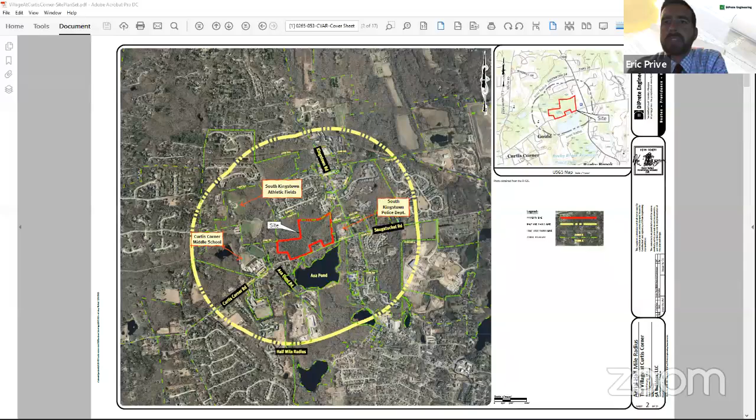If we could go to the existing conditions plan. Perfect. Yeah, that's fine. Back a few, please. One more. Two more, sorry. Perfect. So there's the existing conditions.

So as I mentioned, 28 acre parcel. It is zoned R20. It is a wooded site. You can see right here, there is a wooded swamp complex located in the northwestern corner. Right now I'm looking north, effectively due north for the most part. Curtis Corner is running east-west here.

There were some frontage parcels done by the previous owner, located right here. There are four homes located in the center of the parcel. The parcel itself has about 7.4 acres of uplands here. This is the area in the southeast corner, and that's where the development is focused.

That area is a wooded site today. There are a few stone walls located as well, right through the middle here. You can see a couple stone walls throughout.

There are public utilities in the street. All public utilities are in the street, so public water, public sewer, and there is natural gas as well.

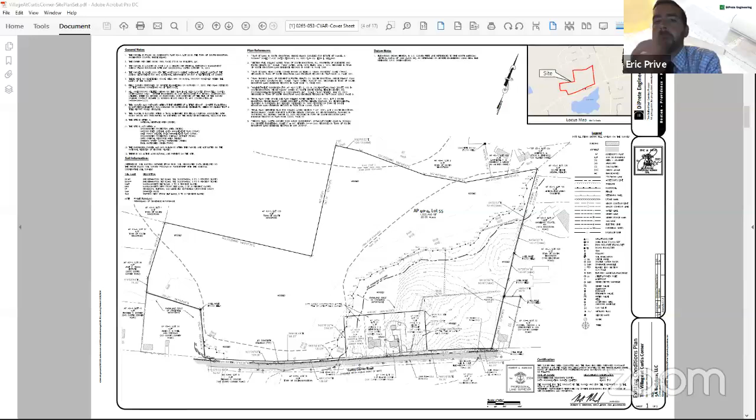So if we could go to the overall plan. I think that's two sheets down. Perfect. Thank you very much.

So this is the proposed development. As mentioned, it is a 24 lot, 32 unit residential subdivision. It is effectively the same as what was presented and approved at the master plan stage. The road comes in directly off of Curtis Corner Road, goes north-south, then takes a left towards the west, with all of the lots off of it.

Since the time, as Attorney Kenyon mentioned, we've gone through and done all the detailed engineering required to follow up that master plan. The conceptual approval happened at master plan, and then we needed to go through and do all the details for it: the grading, the drainage, the utility work, the roadway design. All those details have since been prepared.

This has been presented both to the DEM Freshwater Wetlands Program, as well as to your town entities. I know they've been reviewed by Department of Public Services. I see Mr. Bourbonnais is on tonight as well. We've also gone to a technical review committee meeting, and we've ironed out all the details as far as some of the technical elements.

To give an overview of the stormwater, we do have, as required, mitigation of all the stormwater from pre-development to post-development conditions, providing water quality improvements meeting DEM's best management practices. We have an infiltration basin located in the back left portion at the end of the road, able to collect everything from the road and a majority of the back portion. There's a ridge that runs naturally through here in an east-west fashion, pretty much in the lot 20 to lot 4 range.

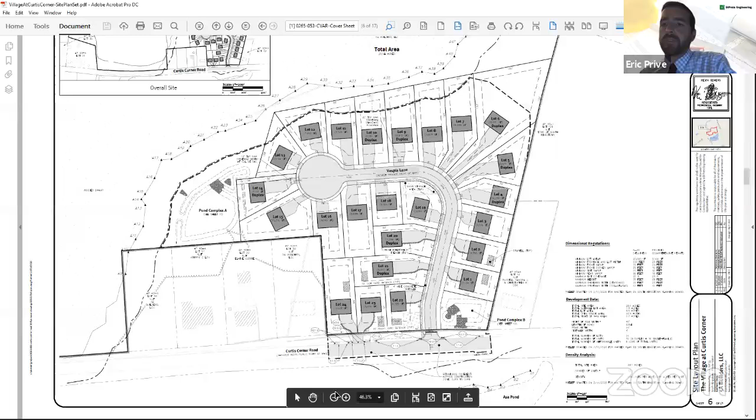So as mentioned, this has all been submitted to the town staff for review. We believe we've addressed the conditions that have been discussed. We have received Suez water approval. We have received approval from the Department of Public Services for the sewer tie-in with the sewer feasibility study and downstream carrying capacity analysis. I think that's the general summary. I'd be happy to answer any questions.

Actually, one other thing I wanted to add was about the lots in the front - we also added some additional stormwater measures. We really wanted to make sure we decreased flow to that front area, understanding the concerns of our abutter who spoke at the last meeting. So we added dry wells for the homes - I'll just circle one. For all the ones in the front part of the watershed here, we have driveway trenches along the side to pick up and treat the driveway and infiltrate extra on site, and then dry wells in the back too, picking up the roof leaders and putting them directly into dry wells for all the units in the front that are contributing to the front today.

For the benefit of the audience that maybe haven't seen all the drawings, can you just go over the size and the depth of these ponds so they have an idea of what they're looking at?

Sure - so the size and depth of the ponds: the depths are usually around 2 to 3 feet. They're made to meter out, and they have to meter out within 36 hours to ensure they're not holding water - we don't want to be holding them for mosquitoes or anything like that. So it's all metered out in that amount of time, the one in the front as well. So there's two major ones here.

So there's one located in the back here, and then there's one located in the front, the southeast corner as well. It'll treat it on site, infiltrate it directly back into the groundwater, and also meter it back out to mimic present day conditions. As required by both the town and the state, it needs to work for all conditions, the 2-year, 5-year, 10-year, 25-year, and up to 100-year storm event. So we've mitigated all of those measures.

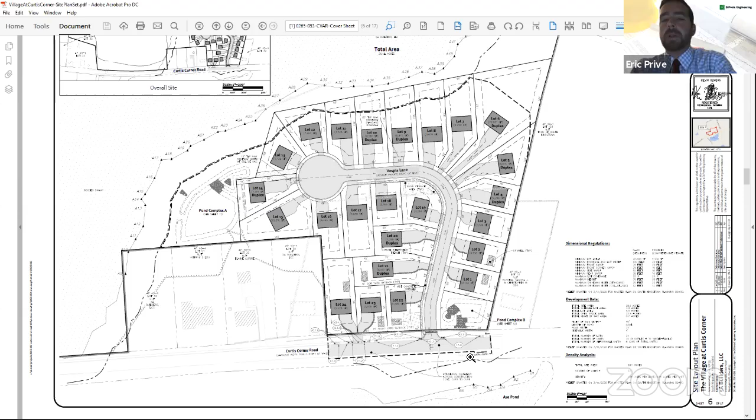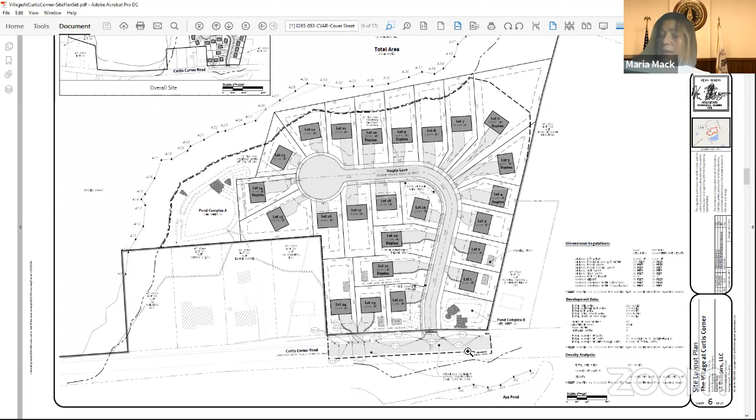Okay, board members, any comments, or staff, any comments? Mr. Prive, could you explain the difference between the locations and the slopes and dimensions of the ponds since we last saw this at master plan? Also, on sheet 11, could you give us more information relative to the embankment of the pond, specifically the impervious embankment?

Hoping very much that that does not mean riprap. No, it does not. So, yep, no. Thank you for, yep.

So the embankment is something we've been working on. It is internal to the core of the pond. Anytime the pond builds an embankment in what would be above as a fill condition, we build the impervious core. It's in the whole downstream side to be able to hold up that berm. It's underneath, it's a silt material, and it effectively makes it impervious underneath. What we want to do is make sure we're really holding that water and that it's not causing any future blowouts in that area. So that's what the impervious core is for.

It's meant to, on the surface and visually, look like the grass siding of just like the rest of the pond. It does not look like riprap. It is not an armament or anything like that. It's grass. The core itself is internal to the embankment.

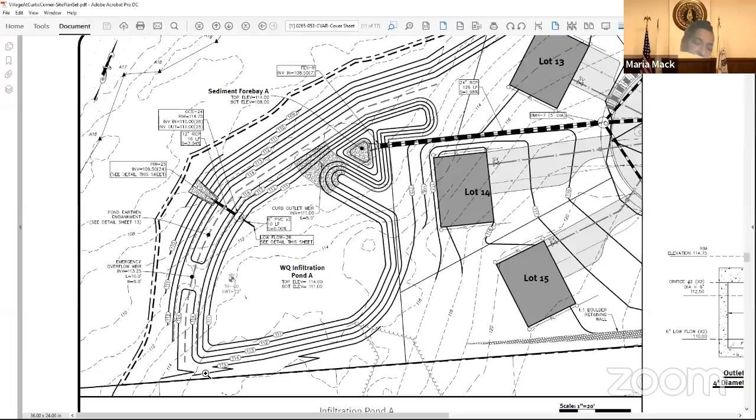And the lots that have these stone trenches, lots 1, 2, 20, 21, 23, and 24, it's understood that that is necessary given the propensity of the site to have flooding and relatively poor drainage. How will those be maintained, and what's the criteria for how effective they will remain?

So as part of the homeowners association, we'll have a homeowners association as well as part of the stormwater program. Both of these ponds have a stormwater program that needs to be done also for the infiltration basins and such. So as part of that, these units would be part of the practices as well. It's sort of a belt and suspenders approach.

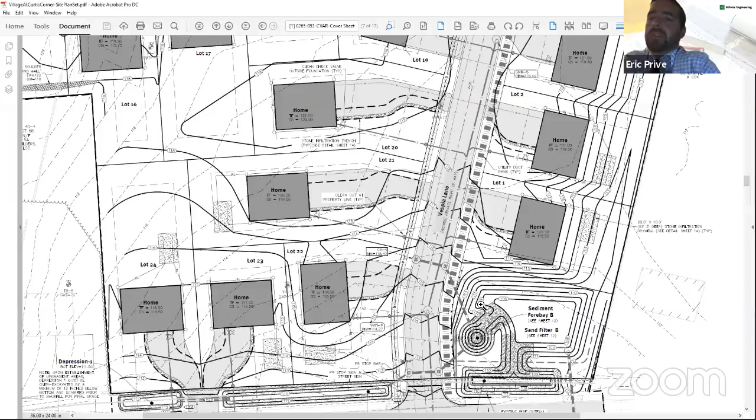We did it primarily for the front ones, knowing the watershed coming to the front area and the swale that was holding water, and knowing our abutters today. So we wanted to add some extra treatment in the front for those units, especially on the dry wells, so we can infiltrate it directly on site. It's also good practice to infiltrate as close to the source as possible. So it would be part of the homeowners documents, ensuring that they get done for compliance.

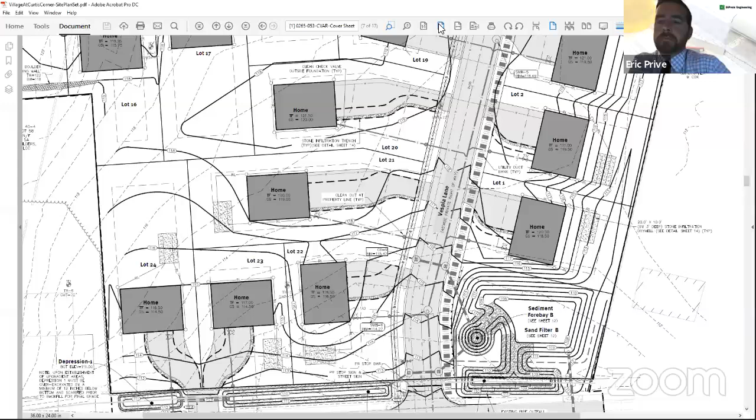Thank you. You're welcome. Eric, looking at the cul-de-sac, it looks to me like it's about 80 feet in radius. That's the standard South Kingstown cul-de-sac that we ran for, to make sure that a fire apparatus could do a full turnaround in that area. So we did not change the size of that.

Okay, so we wouldn't be able to landscape the middle of that without infringing on the turn radius for a fire truck? You mean internally, like in the center of it? It's just, I mean, it's a big impervious space, and we've seen mixed success with that.

The issue we end up seeing with it is unlike some of the storm, the level of maintenance that comes to it and such. So it's not impossible, the calculations are done with the impervious area in there to ensure there's proper treatment, both treatment of it and mitigating for it. But yeah, it wasn't our vision to put a center island in it, just given the plowing and the ease of use, that's really what it came down to.

A lot of times when you put an island in it, it becomes a bit unsightly sometimes. The actual maintenance and upkeep of any plantings that go in it, for one, if you just do standard grass, you could perhaps, but it tends to become a little bit not well treated.

Yeah, when you look at it on the map, it's huge, and maybe Mr. Carter can address that. If we could do something so a fire truck can still make those turns, it would behoove the neighborhood to maintain it, and if they have an association, that can be part of the plan.

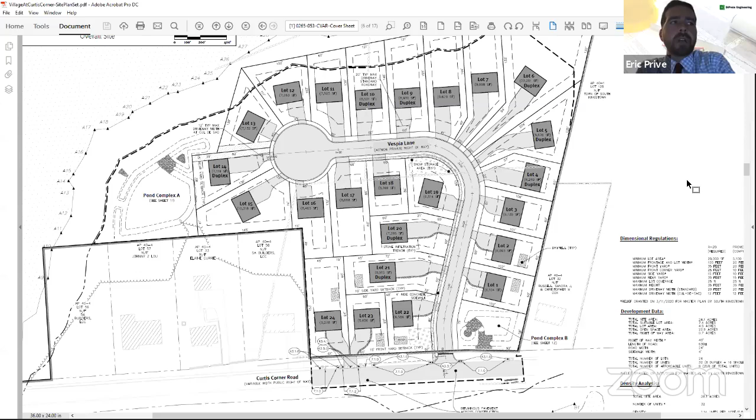My other question was, what's the situation up against the residences? What's the width of those driveways? I tried to measure them. Which area are you talking about, Mr. DiMasi? Actually in front of any of the houses, lots 1, 2, and 3.

You've got reduced curb cuts, like on 1, 2, 3, up to 7. Then on the backside, lots 9, 10, 11, you've got a much wider curb cut, almost the same width as a driveway. It looks like they're over 20 feet in width up where they come up against the house.

Right, and that's what we did. We actually added a note right on the overall plan, a 20-foot typical max driveway standard. I believe that's required by Public Services for a public road to have. Some of them, when I measured them, were close to 24 feet, but all right.

So my other question is, say lot 11, for instance, can you reduce that curb cut at the road just to have it go directly into the cul-de-sac? Is that what you mean? No, you've got a 20-foot width straight up to the house, whereas lots 1, 2, and 3 are cut back a little where it enters and accesses the road.

Sure, it just reduces some of the pavement and provides a little more greenery. Yeah, what we were trying to do also - can you still get 2 car lengths in there for parking? Sure, yes, you can. Just a suggestion. Other board members may have an opinion on that.

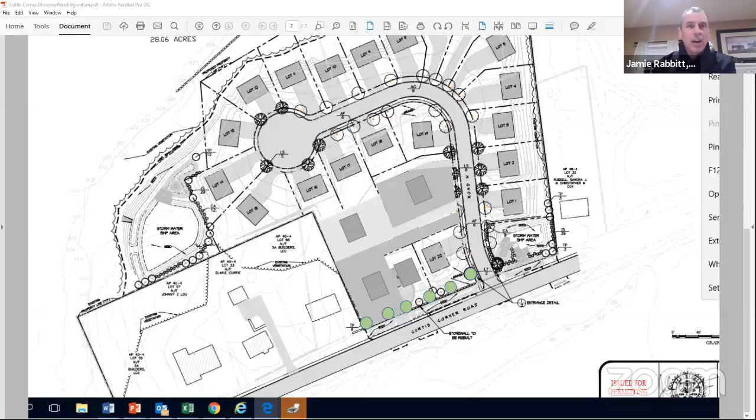24 and 25, we shared the driveway because we tried to eliminate one driveway onto the main road. That's why that has a shared driveway, which was approved on the master plan. What I said is that if you had a concern about the cars backing out, I can understand that. We can do a turnaround on the property.

I could slide lot 24 back. I could slide that house back 30 feet if I had to. There are a lot of other ways to do that than disturb this whole setup.

Regarding your remark about the affordable duplexes, this was discussed at the beginning, all about how we were going to get affordable rentals in South Kingstown. So when we came up with this plan, this was discussed way before the master plan was put together. Then we came in with this plan, and it was approved by the town.

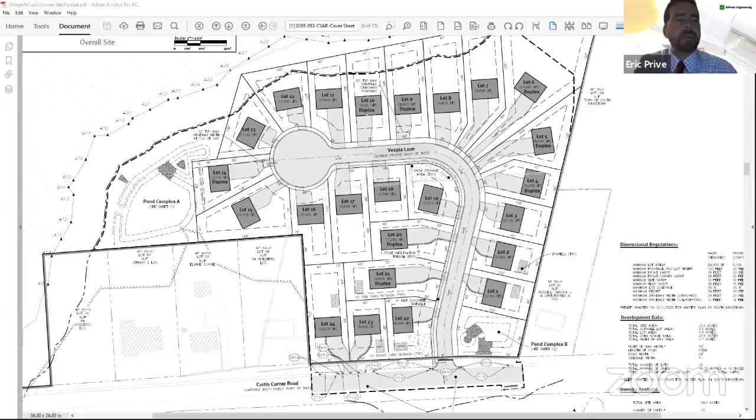I believe that's on the landscape plan too. I may be incorrect, but I believe that's on the landscape plan, that fence around the pond area. Did we add that already? Eric, can you go over again how those ponds will drain over time?

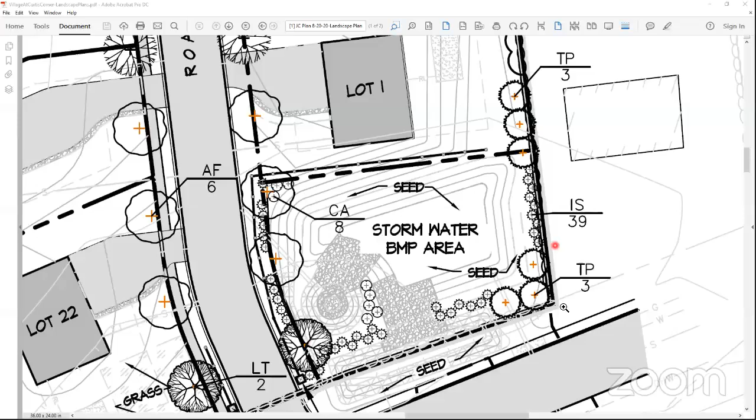Well, can I just say—are you expecting to take down the fairly high stone wall that abuts my whole property on the west side? So I'm more concerned about the house and our driveway going right up against Curtis Corner Road. I'm more concerned about the fencing going across the street area and where other students walk. Unless you're not going to take down my stone wall. No, the stone wall—no, not at all. So I'm not worried about fencing against any of that west side of my property. I'm more worried about someone going out to get the mail and then seeing water and running across to play with it before I can catch them.

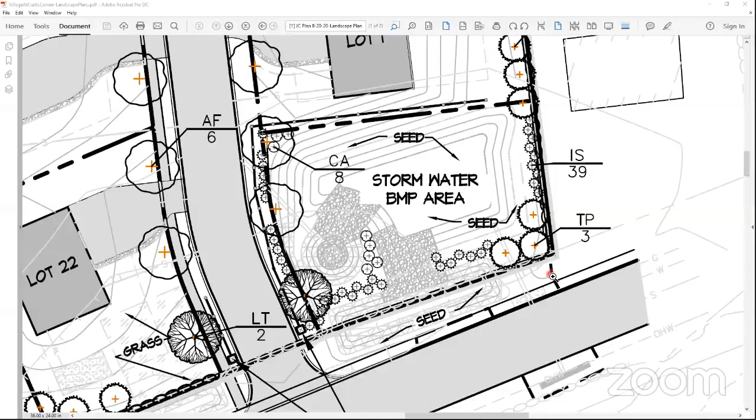And any other walkers—there is a sidewalk all across that front area. Yeah, there is today; it goes off the side of the road, there is a sidewalk, and then it does fall off to kind of a roadside swale today. We're looking to maintain that, keep it the same as it is today. We're not changing any of that, not changing the grades relative to that—it's the same as what it'll be today. We are, however, going to be able to pick it up now and bring it into our pond to treat it first before it gets infiltrated. So we're trying to maintain exact conditions as what's out there today, and not change any of that.

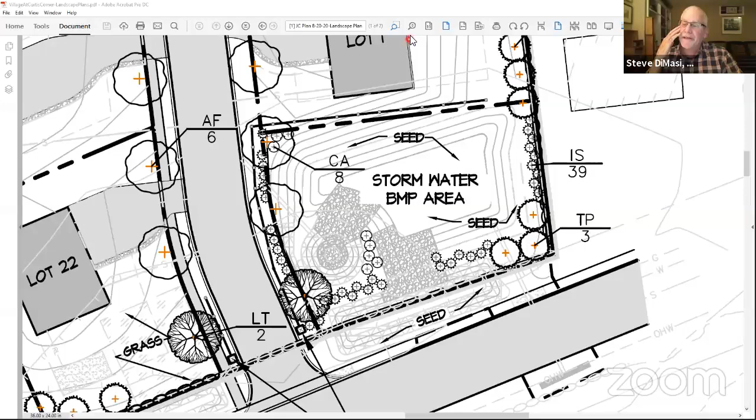But can you just go over how long you expect water to stand in those? She's concerned about standing water. Sure. So first of all, we do soil testing as part of the stormwater design process, and as required by DEM, we do testing through soil evaluations and take a look at what the receiving soils are. They give highly conservative infiltration rates, but we use them, and that's what is used for infiltrating the pond. It needs to be able to infiltrate within 36 hours—that's the requirement. So, Eric, I got a question for you.

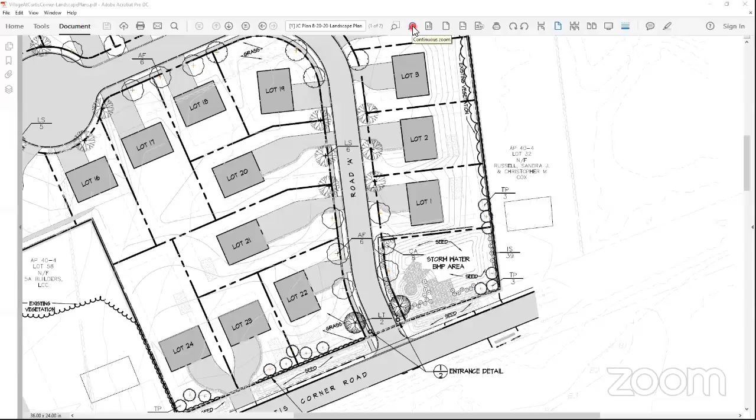This is fascinating, this is the first that we've looked at this closely, and I want to double, triple back up what Joseph Murphy said about affordability. Feels to me as a citizen, if we're talking about affordability, that we're looking for people who can purchase and not rent. But my biggest concern is about Asa Pond and what a development of this density will do.

In terms of extra traffic, in terms of lawn runoff. So I'm wondering if your communications with DEM specifically address the impact on Asa Pond, or whether that's Conservation Commission. Nope, this is Eric Prive again.

Yes, that is part of the application to DEM. So it's all of the wetlands, not just the on-site wetlands, but also the pipe that we mentioned in the wetland across the street. So yes, that is all part of the DEM wetlands application that is reviewed by the biologist and the engineer.

As I mentioned, there is an existing catch basin that's untreated today. We're pulling it into our pond and treating it and providing the water quality treatment that it is not currently getting before releasing it.

And what about the overflow situation you were mentioning? That's if it were to ever overflow beyond a 100-year storm event, that's what typically stormwater is designed for. That's the frequency of the largest storm you would see within a 100-year frequency. So typically that's not what things are designed to.

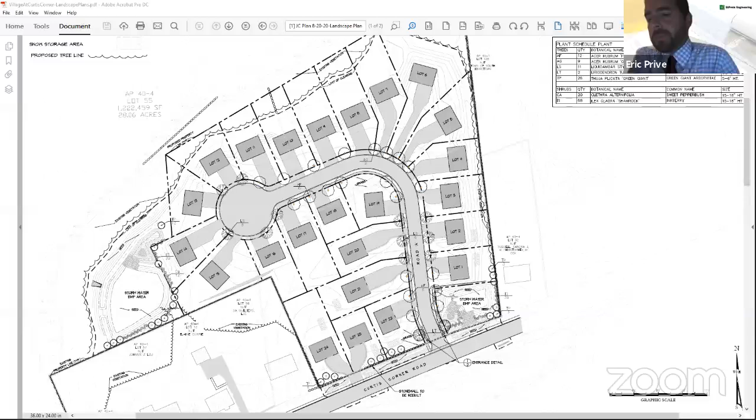And the Conservation Commission would look at those issues as well, or not? Typically, they do look at stormwater treatment, yeah, in general. Okay, great, thank you so much.

Hi, this is Randy Coleman on the other end. So Asa Pond has historically, in the last 10 years, been getting worse and worse with eutrophication each and every summer. We're concerned that at some point there's going to be no pond left whatsoever.

That's clear, and we're not sure what the runoff is, but we're certainly concerned that having this development across the street is going to make the runoff far worse. And at some point, by the way, the town built a beautiful facility here to use the pond, and the pond cannot be used for about 5 months of the year.

And this development seems as if it's contraindicated in terms of that pond being able to be used by the community as a whole. And if it's going to go up there and have any damage, I think that somehow taking that into account and doing something about that's really important, not just for the developers, but for the town to speak up about that as well. It's a beautiful resource, but it's horrible in the summer.

Randy, the town does assess that, and Richard, our town engineer, maybe can address your concerns in that area. Richard, hi, this is Rich.

I'm the town engineer. We went back and forth a bunch with Eric Prive on that suggestion of discharging the pipe across the street. Our position really became more of, it seemed beneficial to us to now be treating roadway runoff, whereas presently it's not being treated. Presently, water is discharging directly to the side of the road. Granted, it's the other side of the road. But treating it and then sending it across the street just seemed to be a better option.

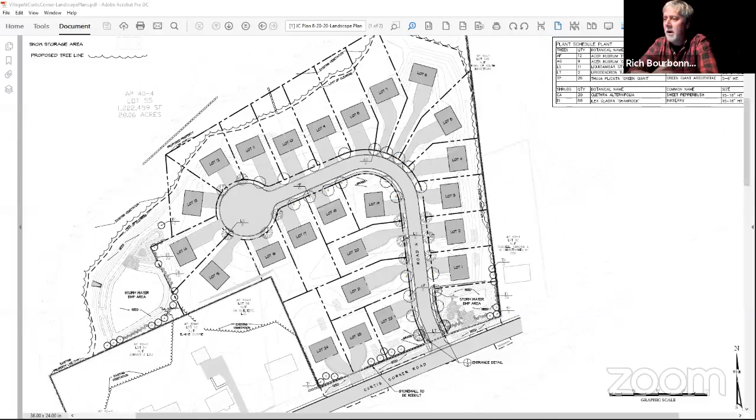Now, it's not proposed to discharge directly into Asa Pond. It discharges ahead of the pond, and it will overland flow through a thickly wooded area before any discharge gets to the pond. We looked at it a bunch, and then we also realized that DEM is involved, and we suggested, Eric and I went back and forth about how it's spread. We thought some sort of level spreader would help to dissipate the flow should it be flowing heavily. We don't want to see any siltation, so we don't want to see any silt flowing toward the pond. But DEM really ultimately has the review of this, and as long as DEM's on board, we thought equally that it would be a beneficial process for treating stormwater.

Right now it goes over to the other side of the road, but it is completely untreated. It's just the way things were. Now we would never do that now, have a discharge like that to the side of the road without treatment, and this kind of takes a bad situation and I believe makes it a little better. So you're getting your twofer with us.

Sorry Rich, but are you saying this is going to be a net cleaner situation for the pond? At the end of the day, it's going to be a better situation. Can't get much worse than it is, and it feels to me like, in some ways, the town who owns this pond is being negligent with this pond and using it as a dump, essentially.

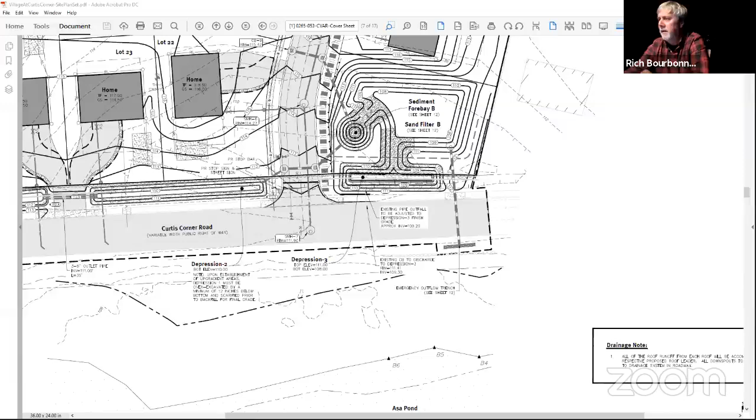But just to be clear, the DEM approval hasn't happened yet, so you're not going to find the DEM approval yet. At some point when it's approved, it'll be available through the DEM website. So really what I'm wondering is, is there still a possibility that we can have some input into DEM's decision making? Well, DEM will make the determination on whether it meets their goals. Right, okay, there's no public input on the DEM level.

There's staff that takes a look at it. And I testified earlier that I did speak to the engineer earlier today, and they said that both the engineer and the biologist had signed off on it and that they were writing up the approval. Okay, that's great, thank you very much.

And Jay, can we bring in Jamie Murdoch, please? Unmute herself. Go ahead, Jamie, please identify yourself. I am James Murdoch of South Kingstown.

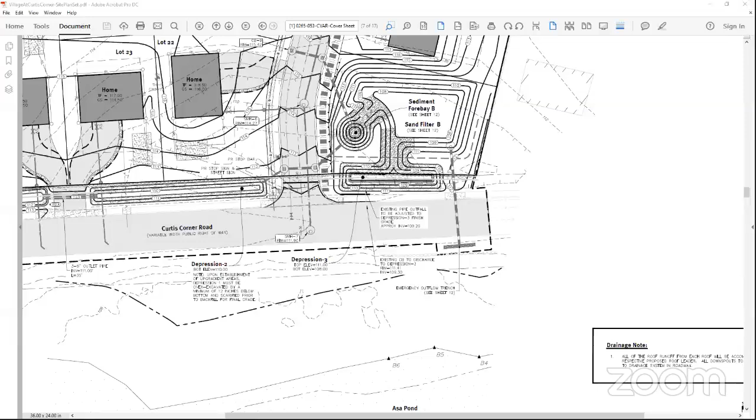I was looking at the Rhode Island housing letter, and it says that all 32 units would have 3 bedrooms. But I thought I heard 2 mentioned during the meeting. So I want to understand, is it 2 or 3 bedrooms?

End of the first paragraph from Rhode Island Housing, October 21st, 2020. Yeah, it does state that. Last sentence: all 32 units will have 3 bedrooms.

John, somebody want to address that? I believe he's correct, the Rhode Island housing letter does talk about 3-bedroom units. I think Alex, when he first was looking at this project, was talking about 3-bedroom units, so we put in the maximum amount there. So I guess there is a possibility that some of them would be 2-bedroom, some would be 3-bedroom.

Okay, well, is that a legal issue, Peter, legal counsel? So the issue is that the letter of eligibility from Rhode Island Housing stated that all 32 units will have 3 bedrooms, and the applicant is not planning to have all the units that way.

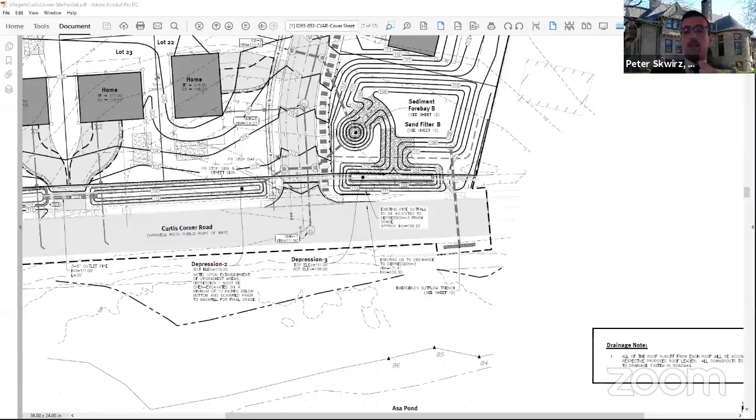John, would you be able to get an amended letter of eligibility from Rhode Island Housing on that? Yeah, I don't think that'd be a problem. I think that's probably the way to address it. We'll make sure that we get that in then.

Steve, anything else? I mean, I still would have concern, even if we are locked into the affordable units being one half of the duplex, there's still a requirement that they be of the same size and scale. So I think we have to come back to decide that. If the affordable unit's only going to be 2-bedroom and the others are 3, we're not meeting the requirements of the state requirements for the comprehensive permit. So before we jump and say let's allow some 2-bedrooms, I'm not sure that's the appropriate thing to do. I agree with you, Joe.

I was going to say, for the next meeting we'll have to have the applicant address some of those issues, and we'll go over what we want from him before we finish tonight, but obviously that was a major issue of the board's. He's clarified that it was specifically laid out, but I don't think the size was. Right, so if they also have to be comparable in size, then.

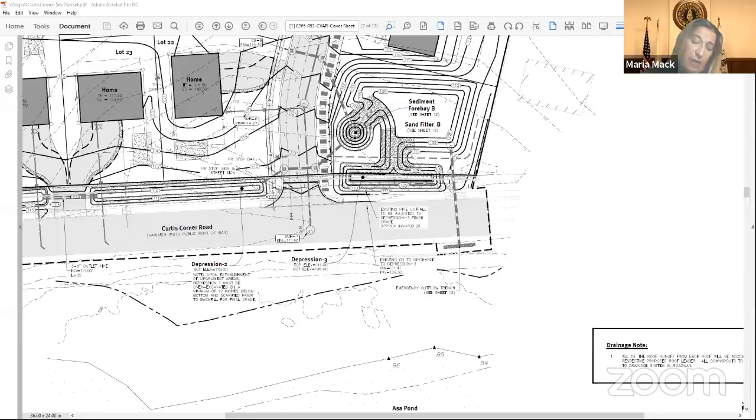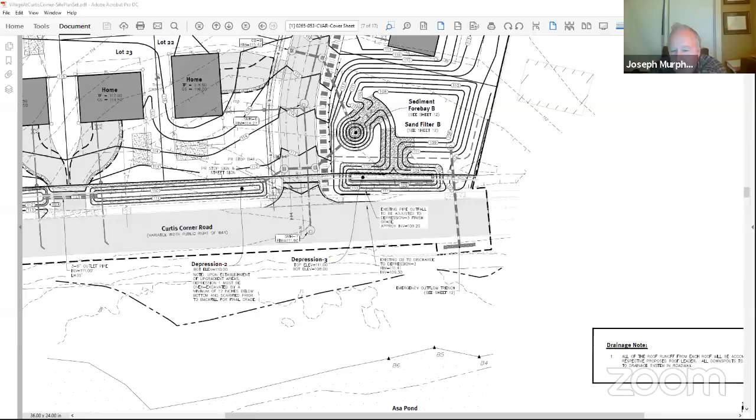I'm not sure I agree with Peter's assessment. I do not recall having approved a general approval at master plan, and that's why we specifically added condition number 4, relative to the fact that the units shall be integrated throughout the development, and shall be compatible in scale and architectural style. That condition still stands, and the issue of equability still has to be met. I'm thinking about comments we've received from legal counsel on other projects relative to master plan. We've been advised that density is something that has to be determined at master plan, while other things can be engineered or corrected at preliminary. So I understand Peter's argument, but it's not consistent with the direction we got from legal counsel on master plan and preliminary plan in the past.

But would your argument be that if they're made bigger, it would meet the requirements? Your argument is the size, Joe? Well, I probably have several reasons, but if it's determined by legal counsel that we're locked into allowing them to be just duplexes, I can go along with that if that's what I'm being told. However, there's still a requirement that they be compatible in size and appearance.

What I had heard in this meeting from Alex was that essentially the duplexes and the single family units are going to have the same footprint. What that tells me is the units are going to be half the size. He told me 1,600 square foot and 900 square foot, but he also said the units could be interchangeable because the footprint is the same size. That means the affordable units are half the size of the market rate units. That is against the statewide requirements for a comprehensive permit.

Yeah, I agree, so that's something he's going to have to address. At a minimum, we have to address the size, and the duplexes should be twice the size so the units are the same size. But I'm not necessarily convinced that was locked in at master plan. Well, Peter, you can prepare a memo for us on that.

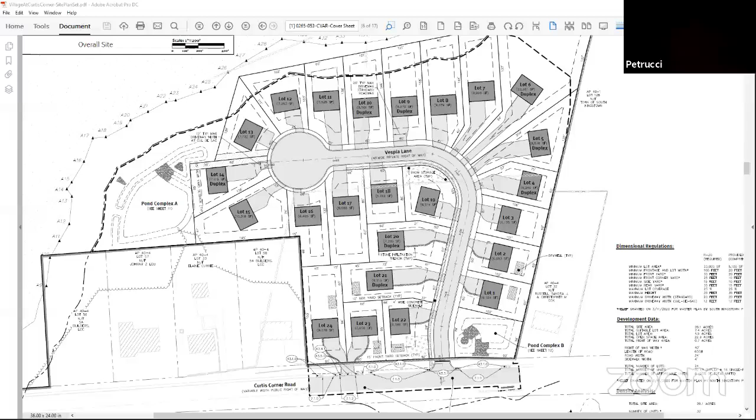So you understand what Joe is saying, that they've got to be compatible in square footage of living space. They can't be half the size. What's got to be compatible, exactly? Your affordable units have to be compatible to the rest of the development. So his argument is that your affordable units are all half the size of your single family units. Well, this is a legal question. Yeah, that's part of Rhode Island Housing's law, that they've got to be compatible. When they say compatible, do they mean compatible in square footage, or compatible in elevations? In size and manner.

Mr. Chairman, can I jump in for a second? Sure, go ahead, John. I think there are 2 issues we have to resolve. One is that it's clear the duplex units would have to be compatible - you couldn't have the affordable unit be significantly smaller than the market rate unit. So that's clear. The question is going to be whether the duplex unit has to be compatible with the single family. And I agree with Mr. Murphy regarding the bedrooms.

I don't think you could have all the affordable duplexes be 2 bedrooms and the market rates be 3, or even the single family be 3 and all the affordables be 2 bedrooms. So I think that is clear. I think what we need to figure out is whether the affordable duplex units have to be the same size as the single family market rate units.

Yeah, I think that's where the issue is going to be. And if I can just...

Going back to the master plan hearing, my recollection is that at the first hearing, Mr. Murphy brought up pretty much the same issues. We then went to the Affordable Housing Collaborative and received their recommendation dated February 14th, 2020, in which they stated that they found the project to be an innovative approach. They talked about the fact that there are mortgage finance products for this exact type of structure, and they found that the location of the duplex structures throughout the development is an appropriate method to ensure integration of the units with the proposed subdivision.

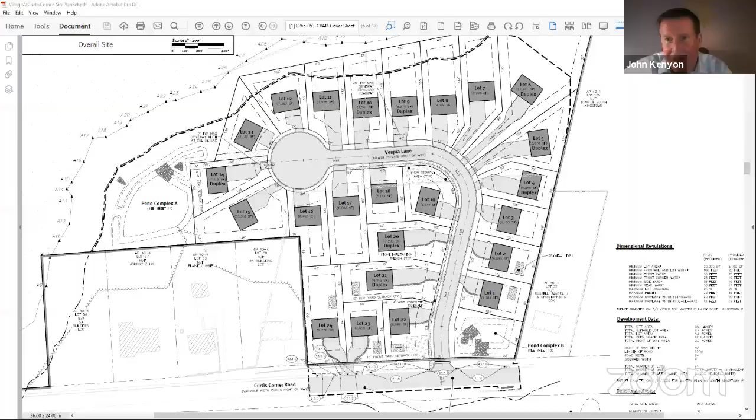I just wanted to point out that we're talking about 24 lots, and a third of them will have duplexes on them, a third will have affordable units on them. So it's almost impossible not to have them next to each other or across the street from each other, because there are more of them, which is a good thing, but it makes it tougher to spread them out when you have more of them.

And just one final note, we appreciate Mr. Rabbit's input on the lots on the left-hand corner. Eric, correct me if I'm wrong, but I thought at one point at the pre-app, we actually had the same type of setup with driveways coming in off the main road.

The board didn't like that setup, and that's why we went with the entry onto Curtis Corner. Correct. But then the reason it had a shared driveway was because phase one had a similar setup, still looking to limit the curb cuts, to not have lots of curb cuts on Curtis Corner Road. So it still had a combined driveway, that's why you have the 2 into 1 there. But yes, there was a layout that had all the driveways coming off the internal road, and one of the issues with that was also having a driveway with an easement through somebody else's, and there were issues of being in somebody's backyard or creating a side yard.

The idea was that we wanted all the units to look similar from the street, so when you drive down Curtis Corner Road, you see the lots fronting along the street. That was the vision we were going for, and having rear alley driveways was modified during that discussion.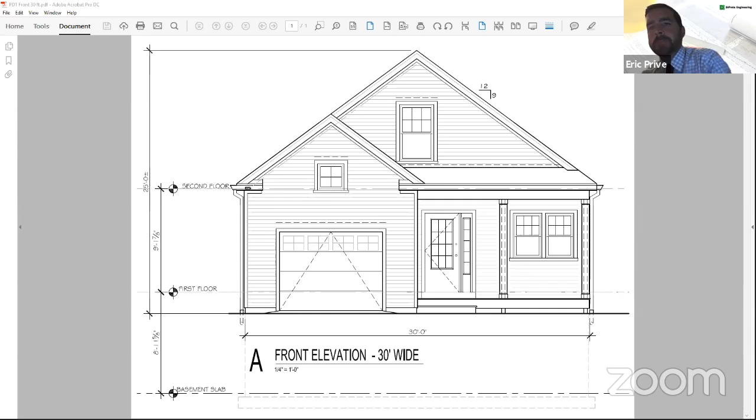Mr. Chairman, can I ask a quick question? You provided - are we missing an elevation for the duplex, which was referred to as a 2-story building today? Yeah, we only had 2 elevations, so. Is it the intent for the applicant to provide elevations of all the proposed building styles? I think just to clarify - duplex from the single family? Just to clarify, first of all, Alex can speak to the answer on whether or not the duplex will...

My understanding was that the visuals were helping paint the picture of what these were going to look like. This project isn't within the Route 1 Special Management District, so there's no architectural say on them. I think Mr. Petrucci said he was willing to provide the elevations as a courtesy, to say here's the vision I'm thinking for this village, this subdivision. So I'm not sure how that applies as far as required materials, but if the question is about compatibility, that's a different thing.

I can help you with some of this. There's going to be a few different designs, and obviously, like any other subdivision we do, we offer 3 or 4 or 5 different styles. I gave you just an idea of what some of them are going to look like, but it's market driven.

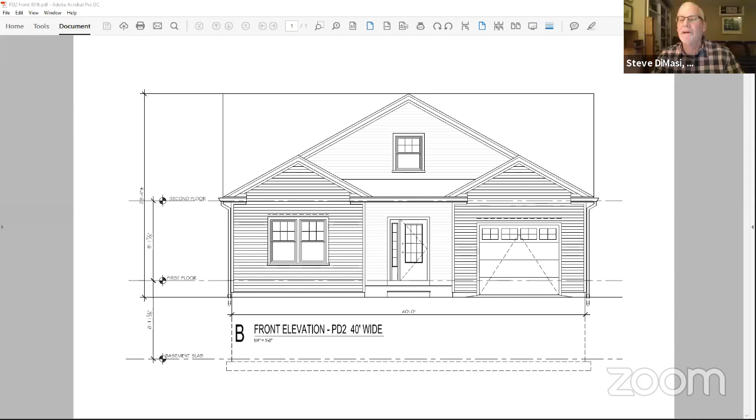And that's why we have the alternate watering for gardens during the summer, sometimes no outside watering at all. But if they can't support a fire, and we have a summer like this one, it went into odd-even and then into an outright ban, and the gardens at my house died. Continuing to add and add to Suez without them enhancing what they can supply affects all of us in town, because water bans - odd-even, okay, that's an inconvenience - but a water ban just means my garden dies, and that's what happened.

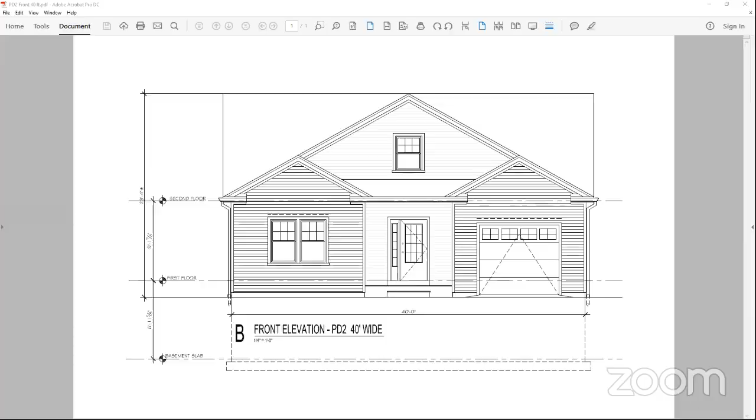So in a general sense, this is all new attachments to Suez Water, and this adds a lot of people - it's not a commercial building. I want to know that you guys are looking at that topic, because I would say Suez is out of capacity, because I can't use water when I want to.

So very tight, a lot of families. Some of these, the driveway and the house could be taking up almost 40% of the lot. So there's not much in the way of yards, and there's no common areas for these families to do recreation or anything. There's no connection to parks - it just goes right out onto Curtis Corner Road.

I think this is innovative in that it has really compacted as much as physically as possible, which is marginal. So that's it for me.

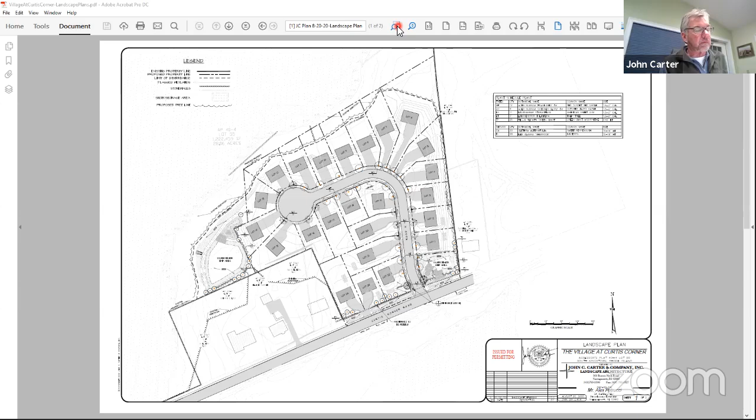I think Eric did a thorough job of explaining the site and the context of the site. Because there's a freshwater wetland and associated buffer on the north and west side of the property, it basically dictated the limit of clearing and the fact that all that extensive wooded area is going to remain undisturbed per the DEM requirements.

So the areas we looked at on the east side are heavily wooded. It's owned by the town of South Kingstown. There's a house on the east side, on the southeast side, which is the only residence at this point, except the new ones that were built recently. This is the older one that abuts the property. I know the owner spoke and Alex replied regarding a fence.

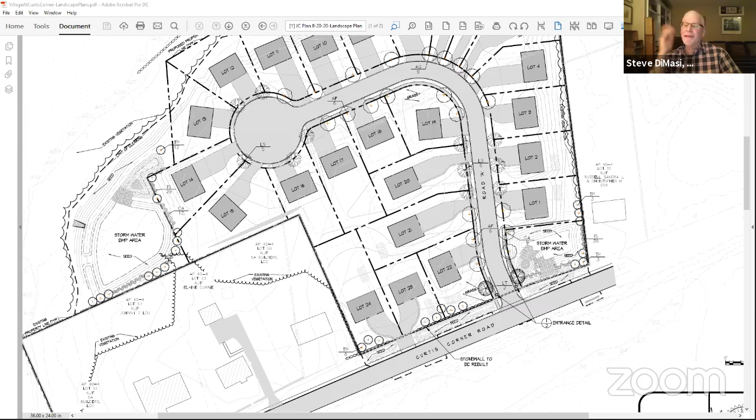But how do we ensure they're maintained and not cut down? I like to think that early on, later on you don't have to worry about it as much. I think people generally, if they have a tree in their yard and it's growing well, they'll keep it - most people do, not all, but most.

But I just want to be assured we get to that point. I want to be able to say, when these individual lots are being developed, you need a couple trees here - that's what was approved.

Mr. Chairman, if I'm not mistaken, isn't it the town's policy now that they don't really want trees planted in the town right of way? Well, no, but I want to be able to - you're right, it's not our policy but it is our preference, because we're just not able to maintain all these trees in the right of way, and even taking them down when diseased is very difficult for us with our budget. What I'm trying to say is when it's planted on private property, which is fine and even preferable, do we have a mechanism by which we can assure it stays in place?

Yeah, Mr. Chairman, I think I can answer that.

I think the way you could do it is to make it a condition of approval that when the plat gets recorded and deeds get sold, there's a restrictive covenant covering all the lots in the plat, that the street trees depicted on private property are required to be maintained. You could put a condition in that covenant that if they don't maintain it, the town could go in, perform maintenance work, and put a lien on the property for the work done. I think that would probably be the best way to handle it.

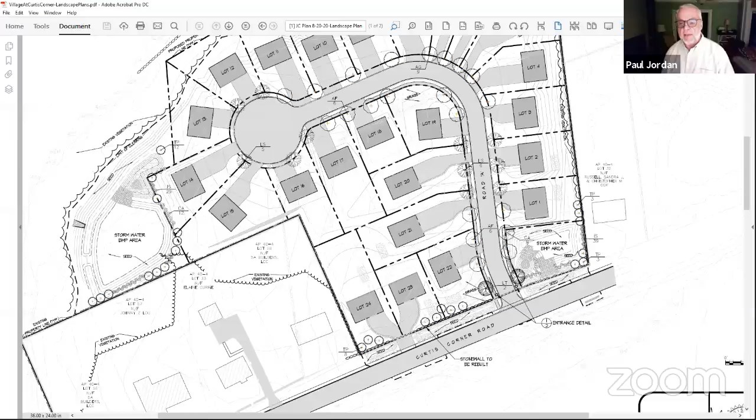I think having something that says the town can step in if you don't maintain the tree seems like a better plan to me. Yeah, I think it's both — it starts with the homeowners association, and then the town reserves the right, if it's ignored or abused, to come in, do the work, and then charge the association.

Paul, I think you're absolutely right that it's difficult sometimes to keep track of what homeowners associations might be doing, especially with open space and whatnot. But what Steve says helps as well — it's really both, like a two-prong approach. What's nice about the homeowners agreements is that it's more likely the homeowner will read those than find some dug-in clause somewhere. I think people understand homeowners agreements pretty well.

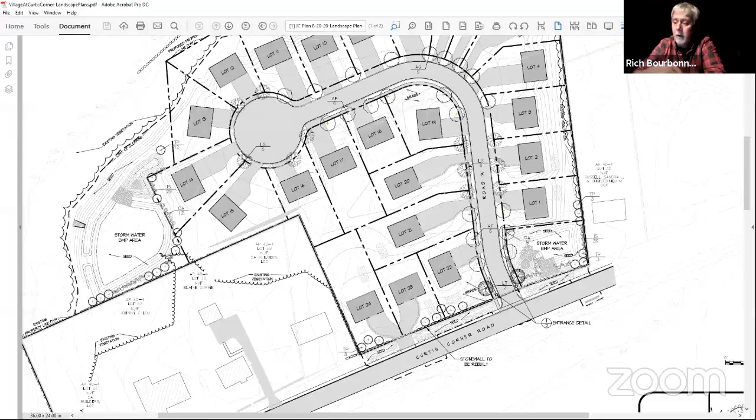Okay. Any other questions from staff or board members before we go to the audience?

Just a point here — I would agree with what Susan and Maria spoke about regarding the density and size of some of the plantings. And just to note, if there's going to be any potential changes reducing the curb cuts, there might be an opportunity to increase some of the plantings as well.

Okay. All right, Jay, can we bring in on the attendees — RJQ has his or her hand raised?

Hello, can everyone hear me? Yes, we can. Can you state your name, please, and address? Yes, Paul Perone, 99 Curtis Corner Road.

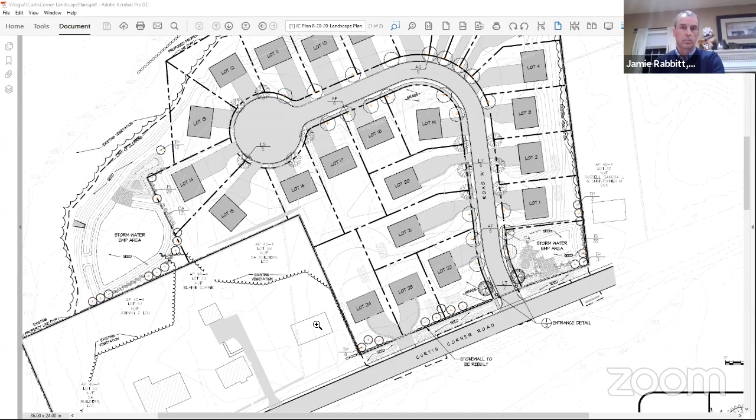Thank you, go ahead. Just a point of clarification - I am the homeowner to the west of lot 24, which is 99 Curtis Corner Road. I don't believe that's appropriately reflected in the drawing. I apologize, I was told that was the plan I was given.

No issue. The only concern I have - I know someone else mentioned buffering, so obviously construction, noise abatement, et cetera. Is there any type of buffering, whether it's fencing or vegetation, that could be installed prior to construction between my home and lot 24, however it's designed or configured?

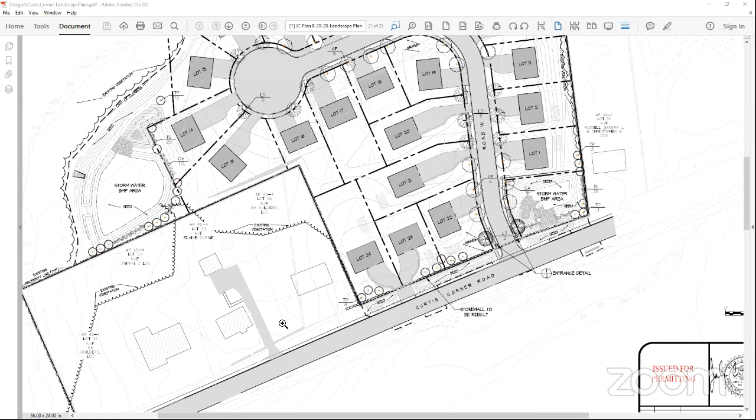I think it's reasonable to ask for some. Given the size and space we have to work with, I think the best thing would be a fence, and I can run that by the owner. I'm pretty sure he would be agreeable to that. That's all I ask, much appreciated. Thank you, Paul.

Any other questions of the landscape architect? Okay, I guess we're all set with you, John. Thank you. I don't know how the board - was there a consensus on what they wanted to do with the cul-de-sac? Are they happy with it as is, or would they like to see some landscaping within it?

I would say yes, if it's possible. It sounds like it may be difficult. If there's something that could be done there, I would say absolutely. Okay.

Maria, Susan, are you okay with that? Yes. All right, John, I guess we'll ask you to see if you can come up with a concept for that cul-de-sac. I will talk to Eric and we'll get together and hopefully come up with something satisfactory. Just to break it up a little. Yeah, I agree.

All right, John Kenyon, did you have somebody for traffic? Did you want to present that? Mr. Chairman, if you remember, we presented our traffic study and traffic engineer master plan. My apologies, we had the new copy, so I saw it there. Did you have anybody else to present? No, we don't. Any other questions from the board?